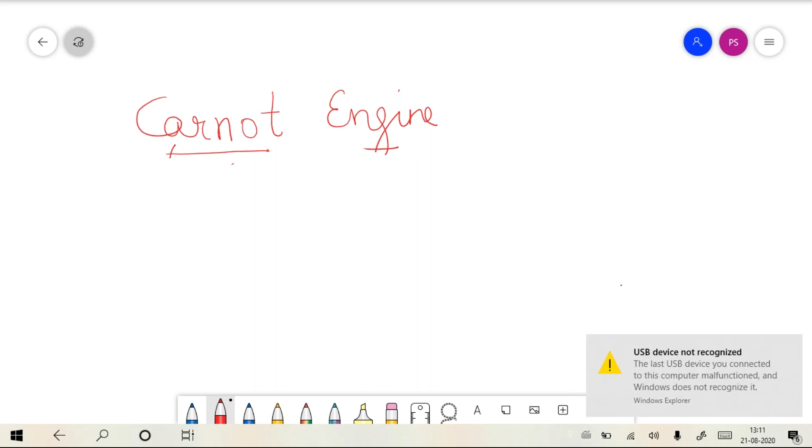Okay. Thank you. Look at this, students. What I have written on the board is a Carnot engine. Understand that when you are talking about a Carnot engine, we are talking about a concept, a very ideal kind of engine which is having the maximum efficiency. So when I'm saying the engine is having maximum efficiency, please note that I'm not talking about... just a minute. Okay, so let me draw a schematic of an engine. Any engine.

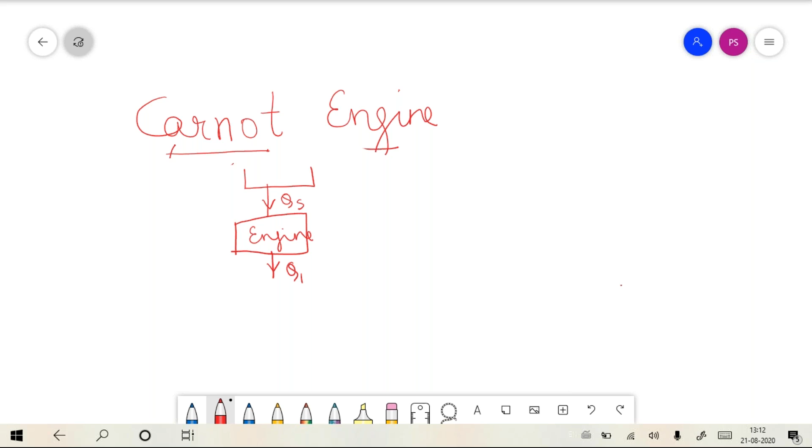Any ordinary heat engine. What happens in any ordinary heat engine? It is supplied energy by some source, and an ordinary heat engine rejects certain heat to the sink, meaning to the environment. So in an ordinary heat engine, this heat energy comes from the source, but this is the real source. And real source means what? For example, in a petrol engine, the heat supply would come from combustion of petrol. In a coal fired boiler, it might come from combustion of coal.

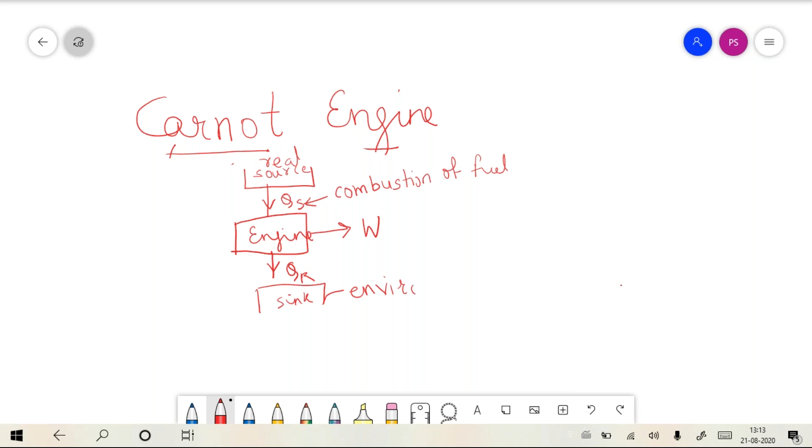So in the actual engines, the source is the real source where you are burning certain fuel, right? And in all the actual engines, the heat would be rejected to the environment. So this is an actual engine. Now what does the Kelvin Planck statement say? The second law, Kelvin Planck statement, says that all engines have to reject certain heat. So the efficiency has to be always less than 100%. That you have understood, right?

Now, what is a Carnot engine? Is the Carnot engine the engine where QR is equal to 0? Can somebody answer this? Ganesh? Ganesh is saying no. Sai is saying no. Anybody else? Yuvraj is saying no. Roshan is saying no. Gauri is saying no. Very good. Pranoy is saying no. Very good. So you are very clear on this now. Let me close this now. Yes, most of you are saying no.

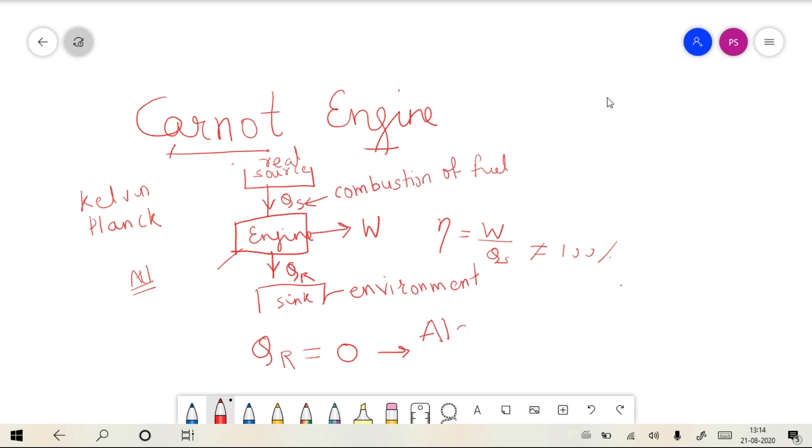So Carnot engine also rejects the heat. Please note, the Carnot engine is not an engine which does not reject heat. So obviously, if a Carnot engine is rejecting the heat, its efficiency cannot be 100%. So for the Carnot engine also, the efficiency is not 100%. Then how much is the efficiency of the Carnot engine?

So can somebody answer this question now? For the Carnot engine, the efficiency is not 100%. So how much is the efficiency of the Carnot engine? Can you tell some value? Sai is saying maximum, Ganesh is saying maximum, Sharwar is saying maximum value. Can you put some number to that? Abhijit is saying 70%. Yuvraj is saying less than 100.

Maximum value, it could be anything. Omkar is saying that. Ritesh is saying 70%. Kunal is saying maximum possible value. Roshan is saying less than 100%. Neha is saying approximately 75%. Okay, all right. So 70-75%, those who are saying that are wrong. You cannot tell the value.

What is the value of the Carnot engine without specifying some other things? What are those other things? I will tell you later. But for the present purpose, you must just say that the Carnot engine is the engine whose efficiency is maximum. It is not 100%. It is less than 100%. This we can say for sure.

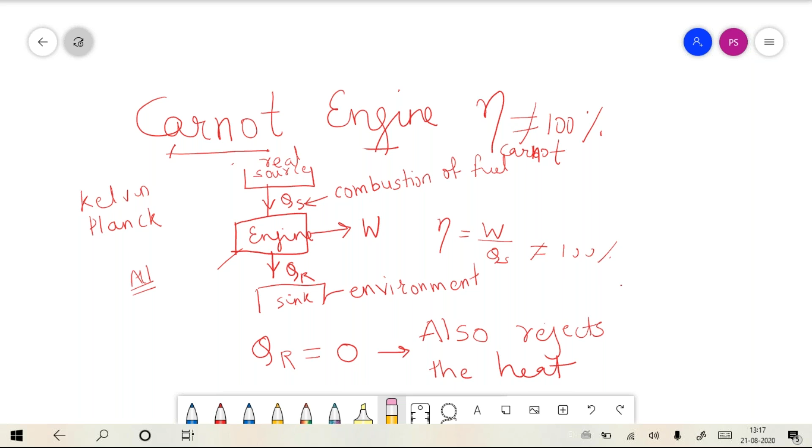So the Carnot engine is the engine which executes the Carnot cycle. Now, what is the Carnot cycle? The Carnot cycle is a set of 4 processes. It is a thermodynamic cycle. What is a thermodynamic cycle? It is basically a set of processes in a definite order which will get you back to the initial state. Wherever you start, you have to come back to the initial state so that the cycle is completed.

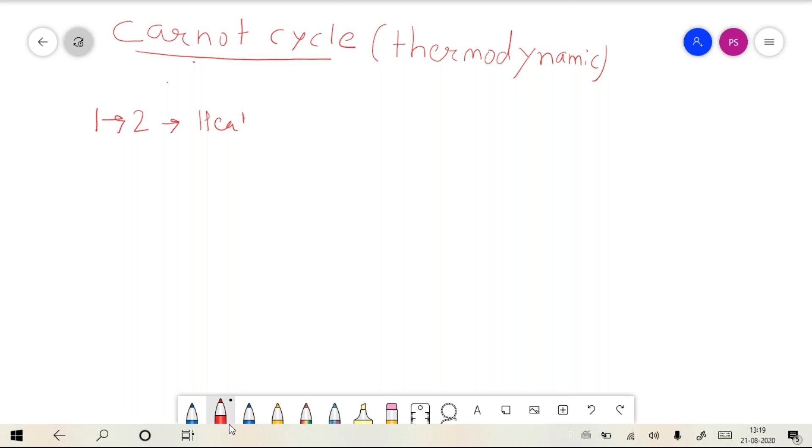So the Carnot cycle is a thermodynamic cycle which has 4 thermodynamic processes. Because it's a cycle, you can start from anywhere, but I would like to start from the heat addition process. There is heat addition happening in the Carnot cycle, that is, in the Carnot engine. And this heat addition in the Carnot cycle is a reversible heat transfer. We discussed this in the last lecture and in the videos, the concept of reversible heat transfer.

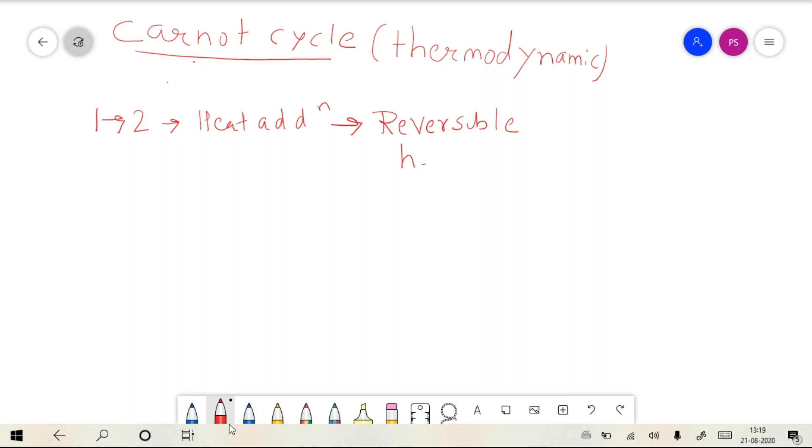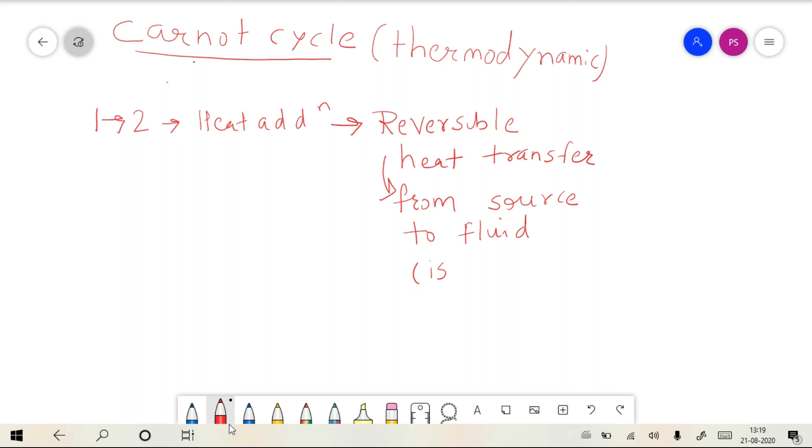So in the Carnot cycle, the heat transfer is reversible, and this reversible heat transfer happens from the source to the working fluid isothermally. So how do we imagine this? We imagine that this engine receives heat from a source. It is the ideal source I am talking about, not the real source. This is the Carnot engine, and this heat transfer is reversible. Meaning what? Let me discuss this.

Let us assume that the source is at a certain temperature TH. We have already discussed the concept of source. Source is an imaginary reservoir which can give any amount of heat to the working fluid of the engine without a drop in its temperature. So the source temperature will always remain TH. And the working fluid of the Carnot engine would accept this heat reversibly, at a certain temperature. That temperature is almost TH. It is not TH. Please note, it is almost TH.

So the temperature at which the working fluid of the Carnot engine accepts the heat from the source is almost TH. Why am I using the term almost TH? Because for heat transfer to happen, there has to be a certain delta T, without which there cannot be heat transfer. So now we are talking about a very hypothetical kind of engine.

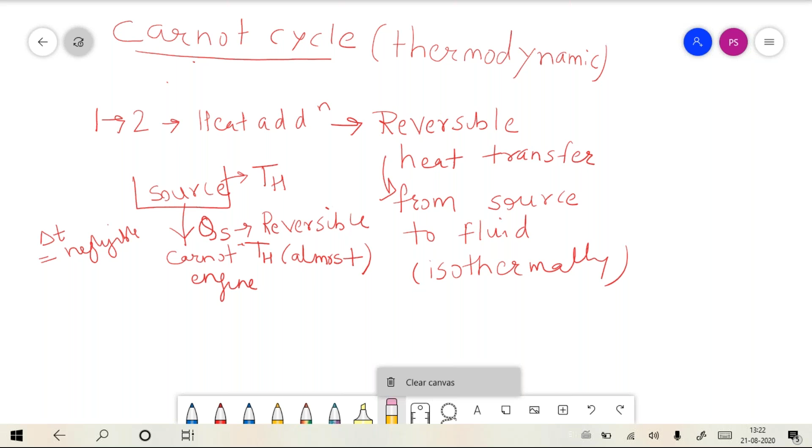Now how can we visualize this? Let me draw some kind of hypothetical engine to show you this process 1 to 2. So one of the processes in the Carnot engine is what? Let me erase this first. I'm not able to. Okay, I will erase this.

As I said, in the Carnot engine one of the processes is the isothermal heat transfer. In order to visualize how this can happen, we would consider an imaginary engine. This cannot be constructed, please note, but we can think of some imaginary piston cylinder arrangement which is frictionless and insulated. In actual practice we cannot have a frictionless piston cylinder arrangement. That is why I'm saying we are talking about an imaginary engine.

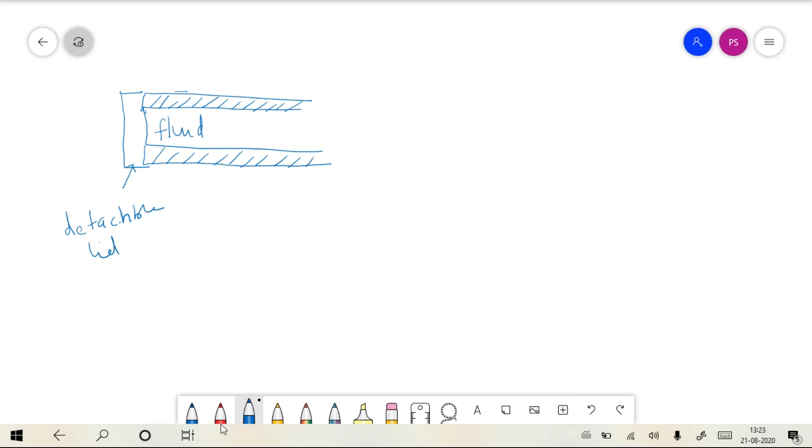Frictionless. And this is some fluid. And there is some lid to this engine, which can be removed and added. This is the removable, detachable lid which can be added or removed. And how is the process of heat transfer happening in this hypothetical Carnot engine?

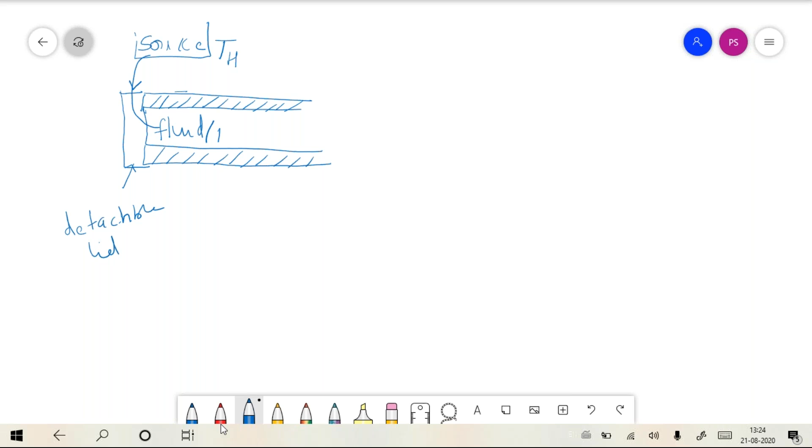What we do is we remove this lid and bring the source in contact with this fluid. Now what would be the temperature of the source? The temperature of the source would be TH. And what should be the temperature of the fluid? This temperature should be almost TH. I am putting TH dash, and please note that TH and TH dash are almost the same. TH dash is almost equal to TH.

So for conceptual reasons, we would say that the working fluid accepts the heat at the source temperature, and this heat transfer has to be quasi-static. It is a reversible heat transfer. Why is this heat transfer reversible? Because this temperature difference is negligible. And then this fluid is accepting certain heat.

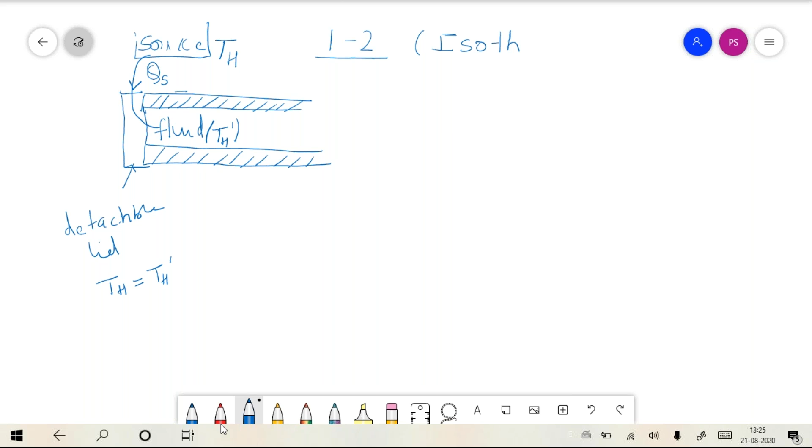Now, if you apply the first law of thermodynamics to process 1 to 2, what is process 1 to 2? It is the heat transfer process. In a Carnot engine, process 1 to 2 is isothermal, meaning constant temperature. It is not only isothermal but also reversible heat transfer. This is the first process in the Carnot cycle.

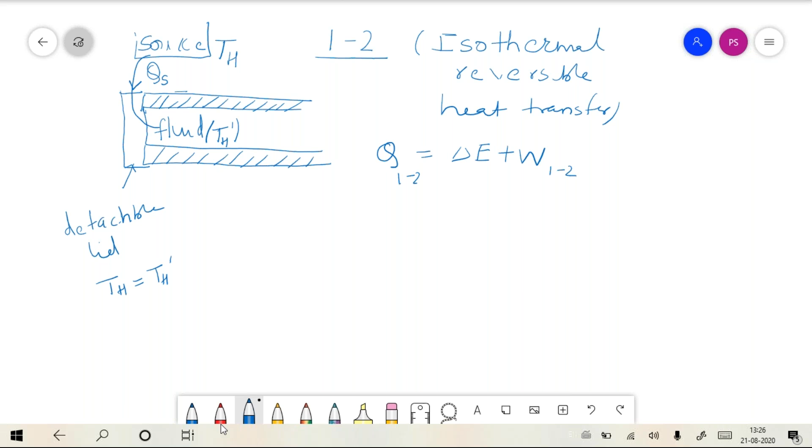If you apply the first law to process 1 to 2, you know that Q is equal to delta E plus W, 1 to 2. Because the temperature has to remain constant, delta E has to be 0. It means that this frictionless imaginary piston would start moving away from the lid, so this is an expansion process. So process 1 to 2 is the reversible isothermal heat transfer accompanied with expansion work.

So the temperature would always remain constant when the heat is being added. And what would be that constant temperature? It would be almost TH. Now, what is the next process? The next process is an expansion process, but there is no heat transfer.

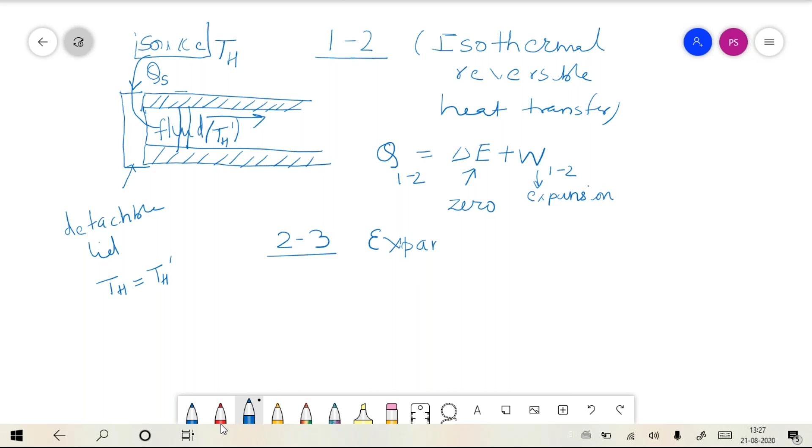The next process is an expansion process, and there is no heat transfer. In the Carnot engine, if this has to happen, and if there has to be no heat transfer, then this has to become 0; this has to be stopped. The heat transfer has to now stop. Okay, so we need to stop this. So how do we stop this?

You can place a lid, okay, which was detachable, and this is also insulated. So place a lid on this. So when you place the lid on this, what would happen? The heat transfer would cease. The heat transfer would stop. Okay, so let me represent this process on a pressure volume diagram.

So we are talking about expansion, and you know that expansion means there is a drop in pressure, increase in volume. Drop in pressure, this is 1 to 2, and then there is 2 to 3. Okay, so both 1 to 2 and 2 to 3 are expansion processes. And what is the difference between process 2 to 3 and process 1 to 2? In both the processes, expansion is happening, but in this process, the heat transfer is 0.

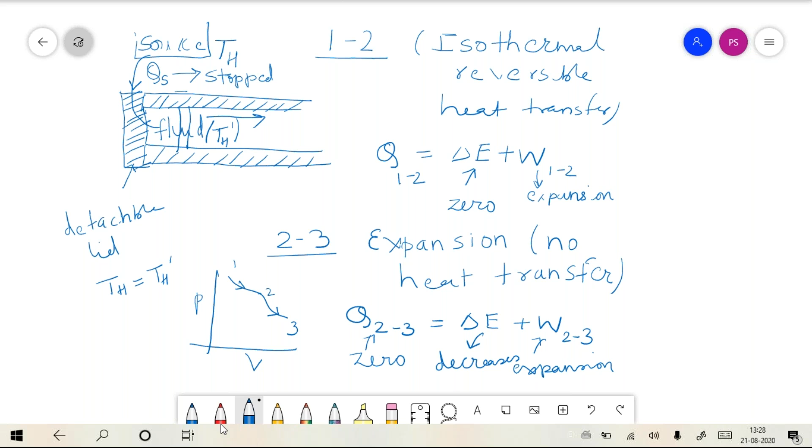So if you apply the first law of thermodynamics here, then this is 0. It means that this expansion can happen, but only if this decreases. Okay, you can put some numbers and convince yourself that this expansion can happen only if the temperature drops.

So this is a no heat transfer process. It means that the process is adiabatic. There is no heat transfer with the surroundings, so the process is adiabatic expansion, and there is a drop in the temperature. And you are getting certain work output. You are getting a work of expansion 2 to 3.

Okay, so these are the two processes on the Carnot cycle. 1 to 2 is isothermal reversible heat transfer. 2 to 3 is adiabatic expansion, where there is no heat transfer because you are putting the lid on it. Okay. Now, what is the next process? The next process is that we need to just reverse now, just go on repeating these processes.

So 1 to 2 is isothermal reversible heat transfer. So 3 to 4 would also be isothermal reversible heat transfer. Now, how to visualize this? So for me to visualize the process 3 to 4, what I will do is, okay, let me rub this diagram first.

I have already shown you the 1 to 2 process. How is that executed? The 1 to 2 process is executed by bringing the source in contact with the working fluid of the hypothetical Carnot engine. Okay, 2 to 3, how is it executed? By putting this lid and making sure that the heat transfer no longer takes place from the source.

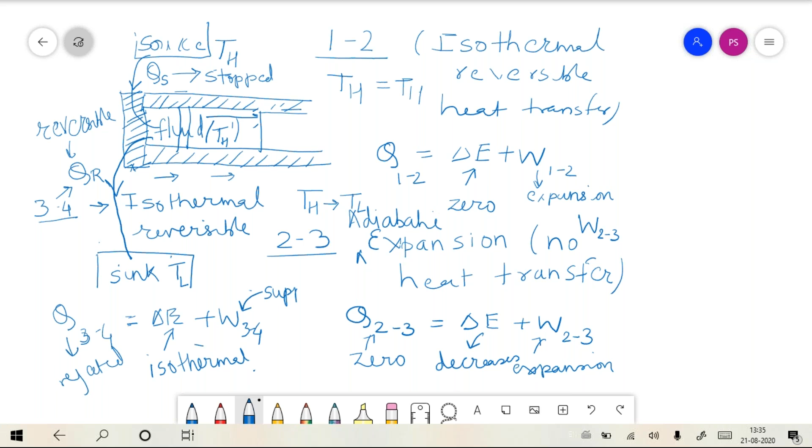So please note that the process 3 to 4 now is an isothermal reversible heat transfer accompanied with compression. And then what is the 4 to 1 process? How do we execute it? If you remember our first discussion, in the process 4 to 1, there has to be no heat transfer, meaning that the process 4 to 1 is an adiabatic process.

And how will that be adiabatic? That will be adiabatic only if we bring this lid back to this piston cylinder arrangement. Then this heat transfer would cease. The heat transfer would stop, and the piston would continue compressing the fluid, as a result of which its temperature would get back to TH. So it was TL initially, it will get back to TH. Are you getting the point?

So please note that in this Carnot engine, there are 4 processes. There are 2 processes which are reversible heat transfer phenomena, and there are 2 other processes where there is no heat transfer. With the nomenclature which I used, in the process 1 to 2 and in the process 3 to 4, there is a reversible heat transfer, and that leads to an isothermal process. So there are 2 isothermals in the Carnot engine. One is the isothermal reversible heat addition, the other is the isothermal reversible heat rejection.

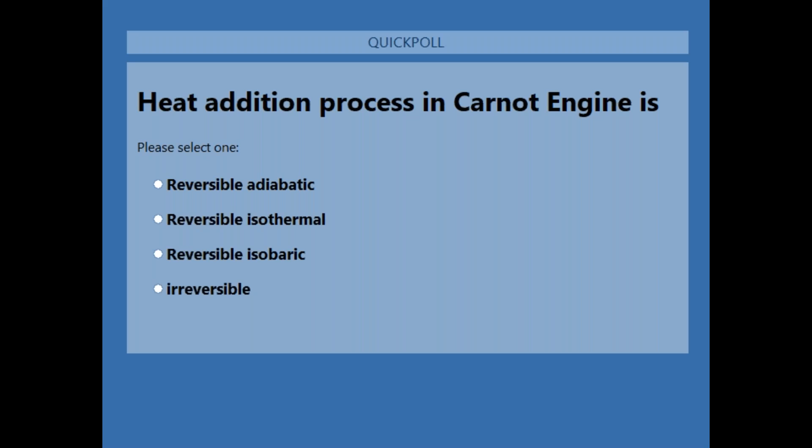So let me close the poll. See the result. I hope the results are visible to you. A very straightforward question it was, wherein I was talking about a heat addition process. So if there is a heat addition process, it cannot be adiabatic. Adiabatic means there is no heat addition. There has to be no heat transfer. When the process is adiabatic, the heat transfer has to be zero.

So obviously, those who are answering that it is an adiabatic process, they don't understand the meaning of adiabatic process. The meaning of adiabatic process is that there has to be no heat exchange. So if there is no heat exchange, there is no question of heat addition. So obviously, the first cannot be the answer.

The 60% of the students who understood have correctly expressed it as a reversible isothermal process. So the correct answer is it is a reversible isothermal process. Some of you, a very small number, are calling it irreversible. There is no question of irreversible process in a Carnot cycle because the Carnot cycle is a reversible cycle. Okay, so I'm hiding this and I'm going to the next question.

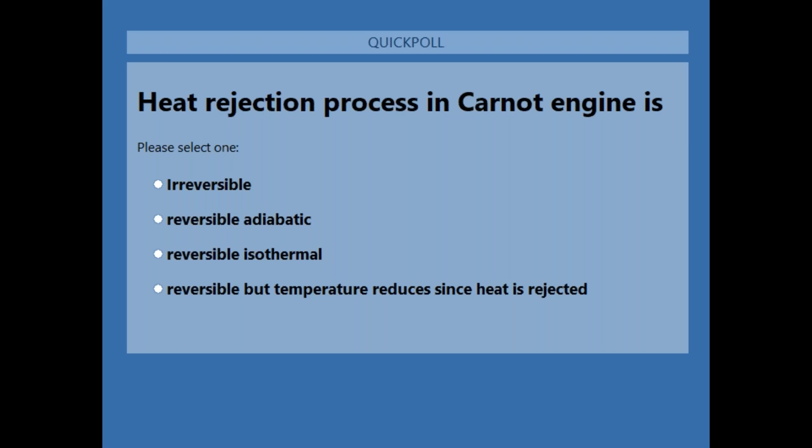Next question. So 50% of the class have understood the concepts. That is not very satisfactory from our side.